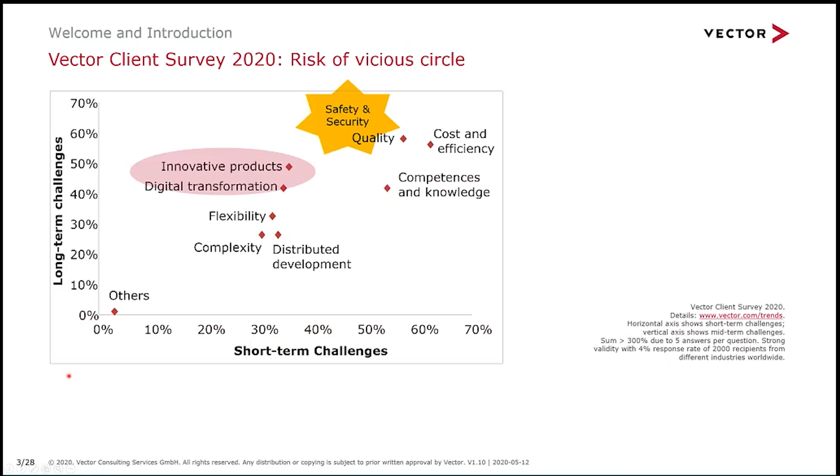Maybe one thing concerning the situation of the automobile industry currently. Each year we do a kind of survey, so this is the latest result of a survey we did end of last year, beginning of this year, a bit before Corona. We found out how companies in the automobile industry are thinking about short-term and long-term challenges. The most important challenges in terms of digital transformation, being flexible, being innovative, and stuff like that.

It is always on, but it moves across the dimensions over the years. If you look at the challenges, short-term and long-term, we always have cost and efficiency, competences, and quality. If you talk today about functional safety and safety in general, that is a quality attribute. Safety is highly demanded and seen as a challenge in both the short term and the long term.

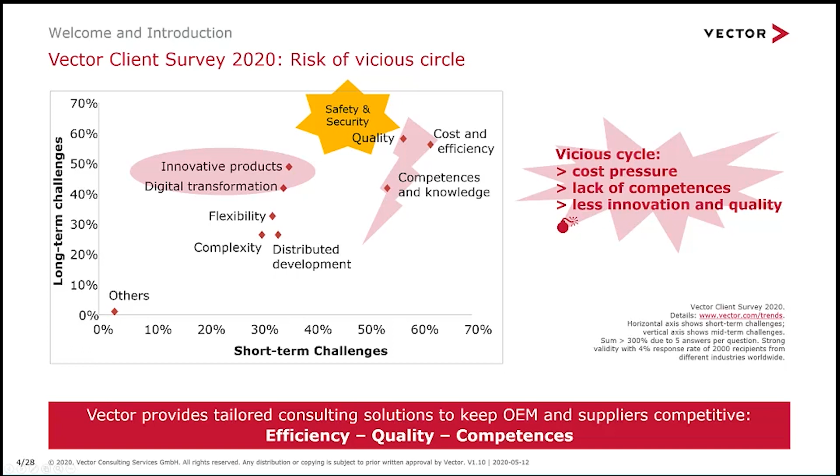So our topic is on the top of the agenda of many companies. We are starting with some of the challenges and concepts of functional safety and safety. We will have a look in the second chapter about our experiences, and before that, we will also summarize a bit the questions and answers. So just to give you a preview, in the middle of the webinar we'll sum up the most important questions answered so far.

That will be in the middle of this webinar to let everybody know what's going on in the Q&A window. At the end, we will also provide a kind of outlook, a conclusion about safety topics we see currently in the industry. And we will give you some advice about upcoming next events on the Vector side you should join to get more information about functional safety and also security, which is another upcoming topic very close to the safety topic.

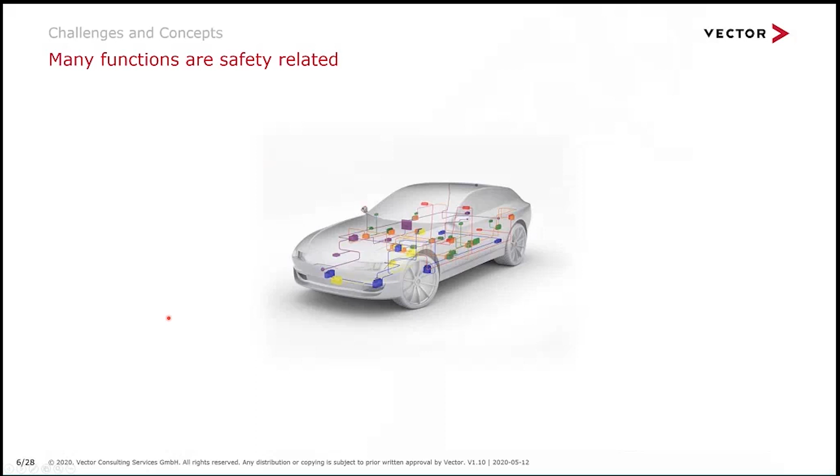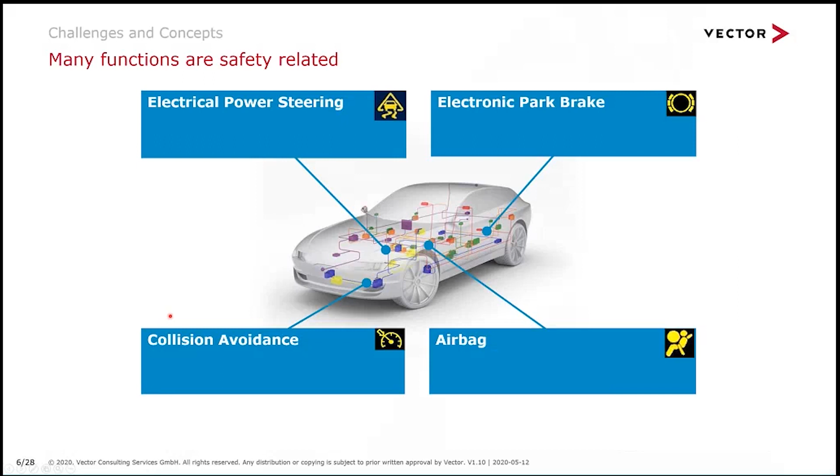Let's start with the basic challenges and concept of functional safety. In the middle of everything is the car with its EE system. If we talk about functional safety, we talk about functions and features, like electric power steering, electronic park brake, and maybe the airbag. There are a lot more electronic systems in the car, functions and features implemented by software and electronics. That is the main focus, the main scope of functional safety.

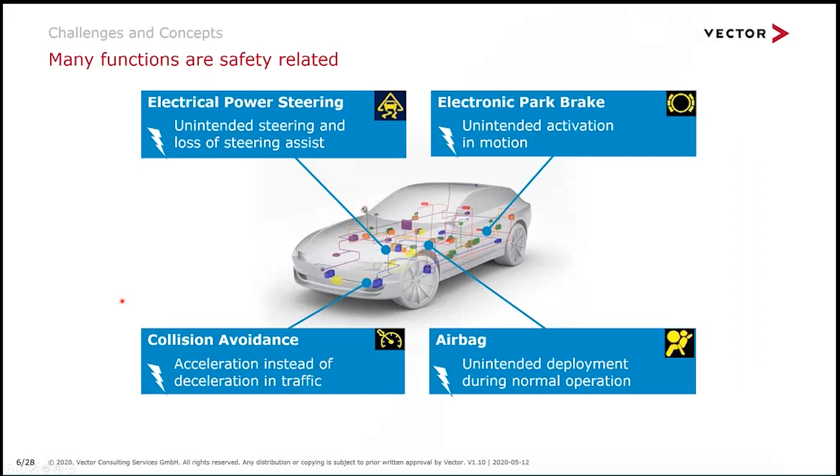Why is it the main scope? Because concerning all these features and functions on the vehicle level, for maybe safety reasons, but sometimes also comfort reasons, they could go wrong. The ISO calls this a malfunction - something not intended on that level of function, like the airbag unintentionally deploying, which is a heavy accident because it could kill people. Also, your electric power steering system could suddenly steer in the wrong direction or not support you with torque.

These are malfunctions which have different effects on the safetiness of the car. It could be a minor issue or a major one, but all of them have the potential to harm or kill people in or around the car. Tying that together: functional safety, and the standard written for it, ISO 26262, cares about how we can avoid a malfunction in an ECU or in communication between ECUs. How can we avoid a malfunction occurring, and if it occurs, how we can mitigate the impact - all with the goal to save people's health and life. That is functional safety.

It is about electronics and software, and about fault detection which then comes out on the vehicle level as a malfunction - that is the essence of functional safety. To avoid confusion, sometimes the features and functions we look at from the functional safety point of view are even safety-related functions like the airbag or automatic braking, which exist in the car to save people's lives. But that is not the idea of functional safety itself - there we look at if the function which should protect our lives, like the airbag, goes wrong, it could turn into the opposite and threaten our lives. That is the point we are looking at from the functional safety point of view.

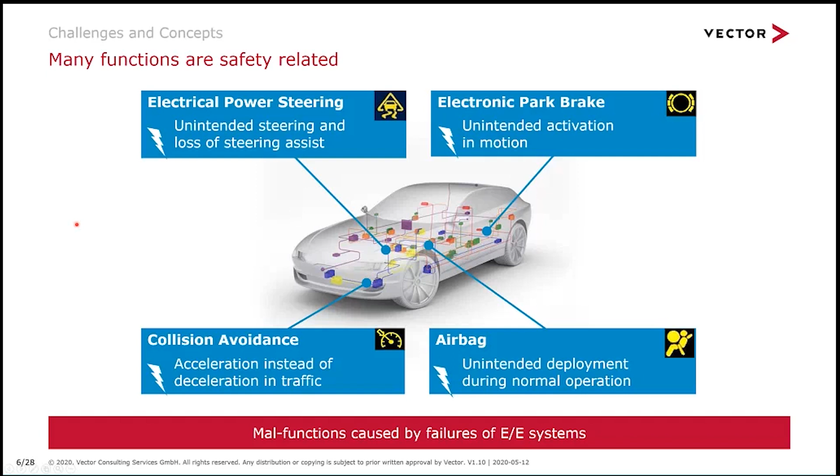Okay, so far so good. The next message is more or less unhappy. Functional safety is, of course, represented by the standard ISO 26262. That's, I think, meanwhile known by more or less everybody.

But the impact of that standard, the impact of functional safety to avoid all these malfunctions, is broad. Unfortunately, it's not just one method in software or one thing in testing. It goes across the whole cycle of engineering activities, but even management activities like project management, configuration management, requirements management. They are all more or less affected by functional safety. So we cannot exclude a portion of a process landscape, unfortunately.

So if you, as a company, start introducing functional safety, you have to be clear that this is a life cycle impacting thing, and that brings in risks of having gaps there and inconsistencies.

But of course, there's no way around introducing functional safety if you are in the automobile industry, because that is meanwhile written in each and every requirement specification: if you have to deliver to a first tier or to the OEM, then you have to fulfill the requirements of ISO 26262. That's a huge effort, not a minor thing you can introduce in the course of a project. You have to set up something like change management to introduce functional safety.

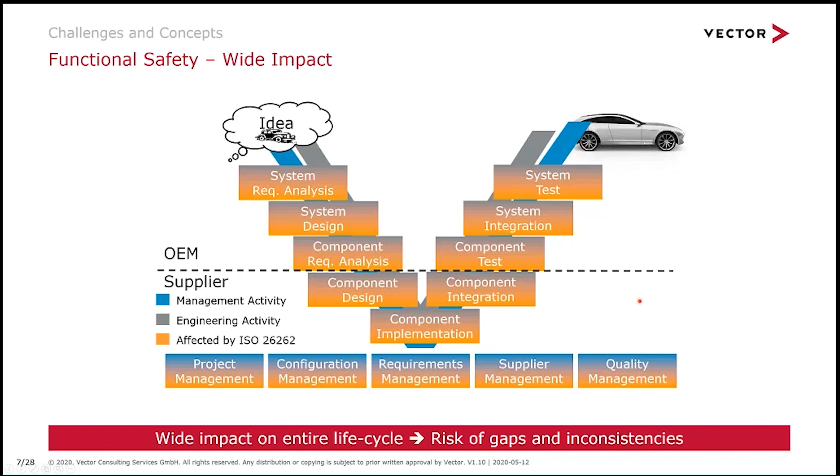Okay, that's some of the unhappy news for us, for guys who are responsible for the process side, more for the engineering side. So what is the next level of detail we are looking at in functional safety?

We have understood the malfunctions, which is somehow here on the right side, on the car level. So the idea of functional safety is that a malfunction is more or less an assumption. We just assume that something goes wrong in an ECU, which is controlling the airbag, or the steering control, the braking system, whatever. That is the assumption, but we don't know the reason behind it.

A hazard is really something we would call in normal language a kind of accident. So now we have bumped into a person, or we have hit the driver by the airbag or whatever. That is the hazard, and that, of course, is what we want to avoid.

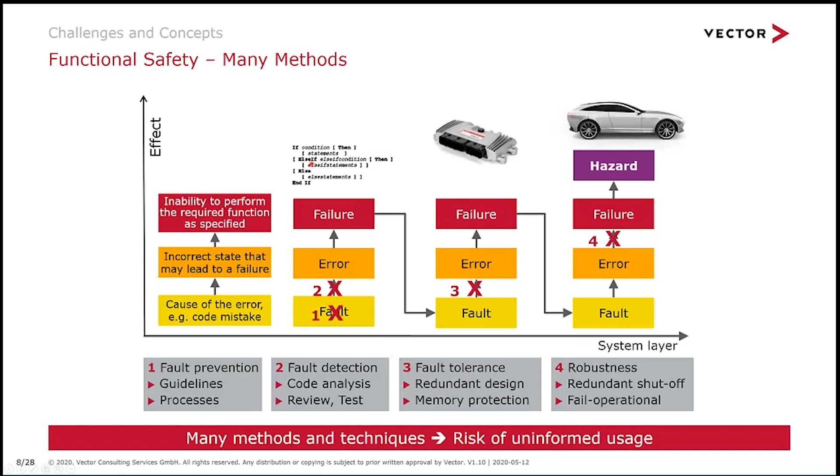That is also important to say a few words about. It is all about minimizing, reducing the level of risk below an acceptable level. So the idea is not having no faults anywhere in the car - that's simply not possible, especially with random faults. You cannot avoid it, you can just reduce the likelihood, meaning reducing the risk that a hazard occurs to below an acceptable level.

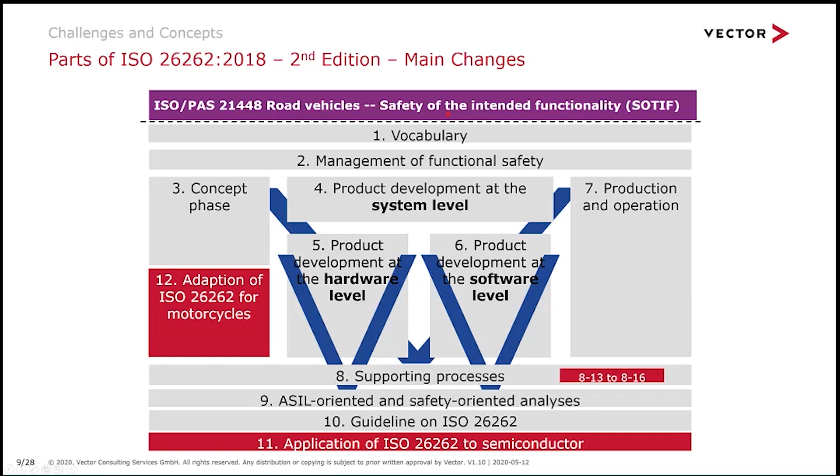Yeah, and SOTIF is its own standard, and what that is about is also safety, but it has to be separated from functional safety. So let me give you a kind of short insight into what the idea of SOTIF is.

In SOTIF, we stop talking about faults inside the car. We are looking to the outside of the car, to the environment, and we say, okay, unsafe behavior, to put it like this, could be also caused by hazards, finally. That's where we meet also the functional safety in that term, but the reason for that hazard could be also what they call functional insufficiencies and also foreseeable misuse by people.

So what is that about? Of course, insufficiencies could be, for instance, I'm using a camera system on my car maybe for adaptive cruise control, kind of traffic sign recognition, and I'm driving towards the sunset. So the sunshine starts blinding my camera, and I cannot detect anything. That means I have a kind of failure in my function, but it's not an internal failure, because the sunset itself is not a failure.

So we cannot avoid driving on roads pointing in that direction. That is not something I can avoid from the technical side. I have to live with that. So I have to at least detect this situation and do something in terms of informing the driver, switching off. That's again very similar to functional safety, but the trigger for SOTIF is something that happens outside of my car, which is somehow something the car with the E-system cannot work with.

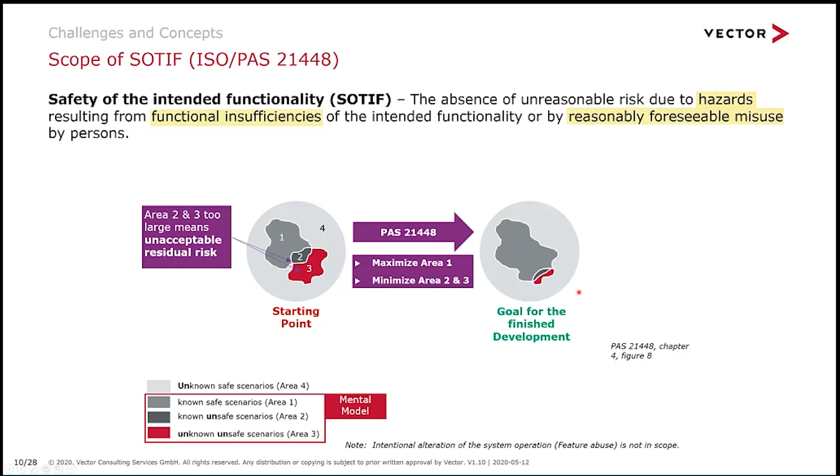And I hope you see the basic idea of SOTIF, how it is different to functional safety.

Yeah, and if you compare both in a kind of big picture, then safety is a kind of - we are making item boxes around ECU sensors and actuators in the car, and we look into these boxes and say, hey, if the fault occurs inside there, how can we avoid it cascading to the outside. So we have to stop fault cascading to the vehicle level by whatever kind of means - process means, or on the car - to avoid what they call a safety goal, that is the starting point of the essential requirements for safety. That's a safety goal. So we have to avoid that somebody gets harmed or killed. That is, of course, the idea of having safety goals.

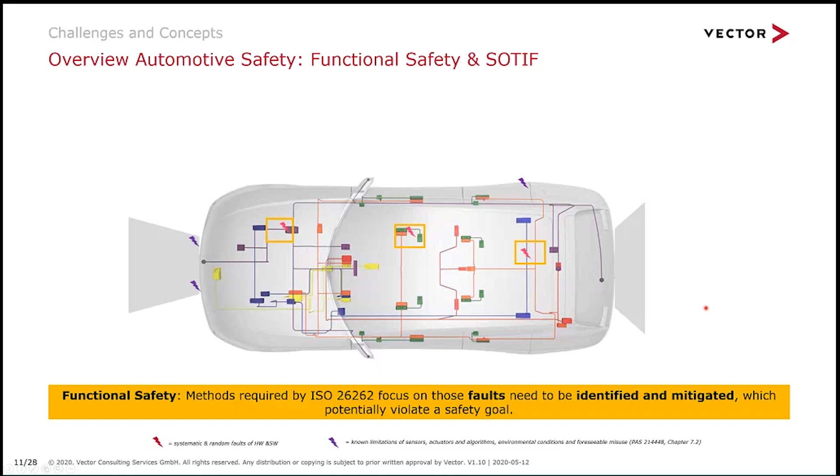So the second thing is then, okay, something is on the outside, my sensor is blinded or is not looking in the right direction, or the angle of my sensor on the front has a too small detection angle, or whatever is the reason behind, could lead to some accidents or some unsafe scenario. And that is a limitation of what we have designed, limitation of sensors, limitation of actuators, whatever. That is the SOTIF part, right? We think about that even during development time, if we have sufficiently good sensors or actuators and also computational power on the ECU, that we are reacting on certain events, the known scenarios, in time before we hurt somebody. So you see there's an overlapping in the goal, but the techniques and methods are quite different.

Okay, so far about the SOTIF, that was a kind of sidestep we have introduced here to the functional safety part. That is the main part, of course, but we think functional safety today can only be understood if you know the other side, which is upcoming, the SOTIF side. But maybe you got also the message between the lines that SOTIF is currently interesting if you talk about level 1 and 2, but the industry knows how to deal with that.

Most of the measures we have to implement is more or less informing the driver if our EE system concerning sensors, actuators, or whatever is coming to its limits, then we have to inform and we switch off. So the engineering part behind is not so challenging currently, but in the future, if we have more and more level 2 plus, level 3, level 4, or even level 5 car functionality, then SOTIF is an upcoming challenge.

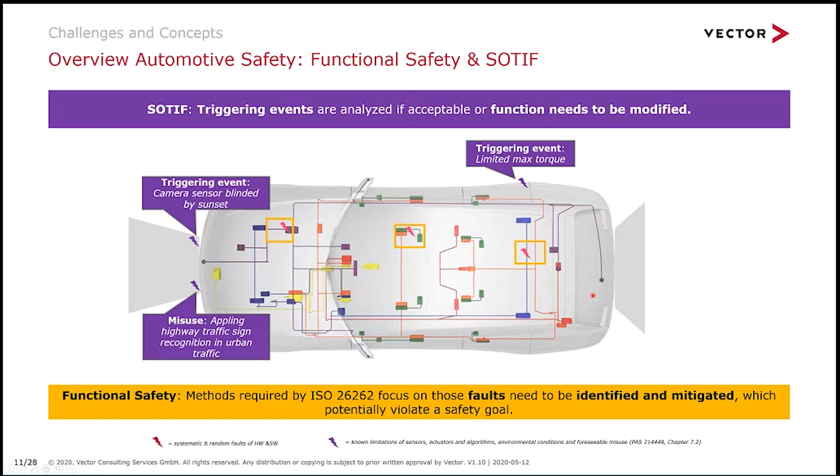So that's the reason why SOTIF today is there, but it's not playing a big role in the area of concerns. That is still on the side of functional safety, because that is from the method side much more demanding.

Okay, back to functional safety. Not to forget to say that it is just one standard in the automobile industry. It's not the only standard, of course. It represents a part of state-of-the-art of science and technology. But there are others. So, of course, all the known process standards like CMMI, of course, laws concerning homologation of cars, of course, very basic standards like ISO 9001 and ISO TS 16949. These are all known and basic standards which are below ISO 26262 in terms of ISO functional safety.

It is building on these standards, not kind of higher priority picture. It is a picture of how we stitch different levels of process maturity together. And ISO 26262 can be seen as a higher level of maturity upon all these other known process standards. But it's not only a process standard, it's also technology involved, right? So it's something I've mentioned already, that we have to do something even on the car. It's not just process during development time.

And not to forget that, even ISO 26262 is basically not sufficient to represent the state-of-the-art of science and technology. If you are precise in that area, then you have to also name the research part, which is shown on conferences or written down in white papers and stuff. That is all part of science and technology. So that means for the legal aspect in the company, just to introduce ISO 26262, it would be a mandatory step, but it's not necessarily sufficient to do everything you can do to avoid liability issues. Right? That is more the message for the lawyers among us, but it's important to say that because safety is about avoiding harming people, so that is naturally the fact that we have to talk about liability.

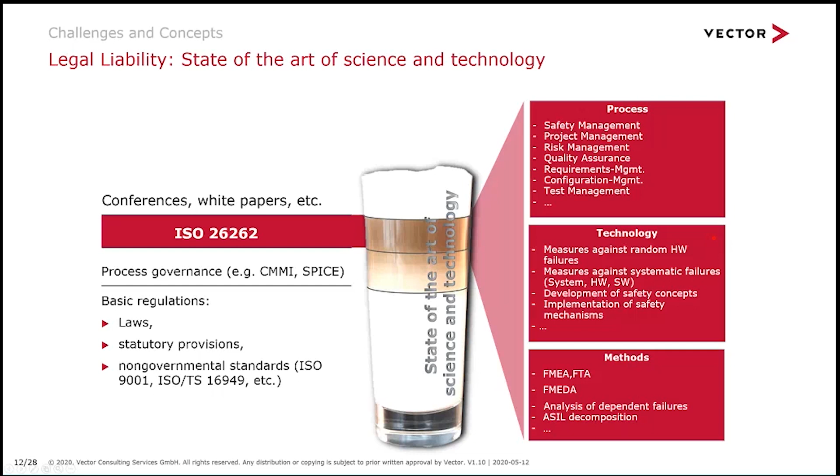And the good news is ISO is helping us to do everything we need to do. It's covering many, many things from the state-of-the-art of science and technology point of view, but it's not everything, because technology and processes are evolving. So again, level of automation is one point. So the ISO standard cannot be on the top of all these developments. It's always a bit behind. So from a liability point of view, we have to care also for things which are ongoing in our industry and shown and documented somewhere else.

I mentioned already the ASIL. That is an important quality attribute in the functional safety area. What is behind basically the ASIL term? The name is of course an abbreviation - it's Automotive Safety Integrity Level. Integrity says something about the quality of implementation of a function.

So how is that calculated, or defined? That is of course a risk value, which is always in quality. We talk about a kind of risk measure in terms of how many faults are allowed for this function. You could express that by ppm or other quality metrics, but that is not done here. ASIL is just a term, a kind of enumeration of 4 stages. ASIL can be A, B, C, or D. That's it - there's no physical unit behind it.

But the idea behind it is: the higher I am in the ASIL - A is the lowest value and D is the highest - it means the higher you go in the range of the ASILs, the less faults are allowed for this function. So that means, on the other side, it is somehow more critical.

What does it mean? That's expressed by the formula you see here above. It's, of course, again the risk formula about the product out of severity and likelihood or probability. That is true for each kind of risk - it's always a product out of these both dimensions.

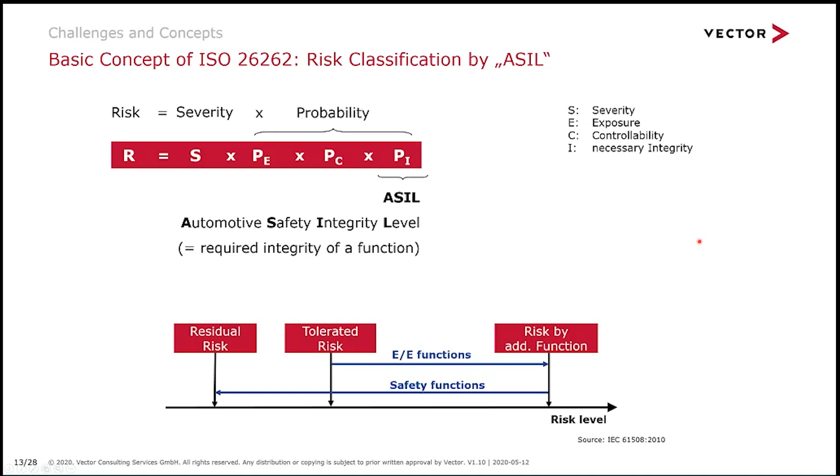So whatever I do in my functions, it is an additional risk, and I have to do something on the car or in the process to reduce the level of risk below the tolerated limit. PI somehow gives me the measure of what I can afford for certain functions, considering the driving situation, to keep a certain level of risk. But we, of course, don't calculate with this formula directly - that is just to understand what ASIL is. What we do is the HARA, which I mentioned already.

This is looking like this. So on the left side, you see scenarios.

It starts with the malfunction. Here we have the example of adaptive front steering, a kind of steering support. It can be no support, or steering turning the wheels into the wrong direction - so I'm steering right, and the wheels are steering left. It can be oversteering, steering too much according to my steering angle, and so on. So we have a certain number of malfunctions, and we put these malfunctions into different kinds of driving scenarios.

Each malfunction typically goes through many driving or operational situations. That's the term used by ISO. It's a kind of driving scenario where you look at the speed of the car, what is the environment of the car - highway, road, in the city, or during parking or whatever - and what are the weather conditions around.

That is all making up the operational situation, and then we do a kind of evaluation of those values we know already: exposure, controllability, and severity. They are evaluated by, again, 4 stages. Each dimension has its own 4-staged model, some definitions, and out of these, by determination of criteria using a lookup table, we get the ASIL.

That's the basic idea of what they call the HARA. HARA, again, is an abbreviation for hazard analysis and risk assessment. That is a method that's shown here.

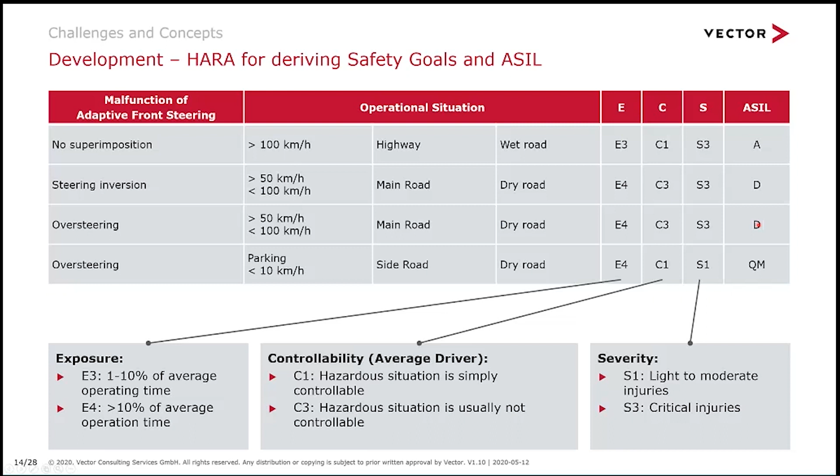That is the starting point of functional safety. Without having done that, you have no safety in your requirements, because behind here, we have not shown all columns. There should be also a goal, the requirements tied to this ASIL. So the ASIL alone has no meaning - you have to tie that ASIL to a requirement.

It's not shown here, but we can see it on that table above. So if you reduce the HARA to the essence, you get a goal out of it, you get an ASIL for the goal, and you get a description of the safety goal - for example, we have to avoid the airbag inflating unintentionally above a certain speed or something like that.

So it's a very general requirement, and we are starting from this requirement, going down. The item comes from the right side, then we have our HARA, and then we go down to the next level of requirements, called functional safety requirements. They further detail out the very high level safety goal into certain separated requirements.

These requirements are allocated then to an architecture - a functional safety concept where we have the software and hardware independent solution. Again we refine this level down to what we call the technical safety requirements. Now we're talking about software and hardware. On the right side, we have again a detailed solution. From that side, this is the technical safety concept, and we have technical safety requirements.

You'll see that the concept of system engineering is deeply embedded in functional safety, doing the refinement of requirements on the left side and the refinement of solutions on the right side, according to certain levels of refinement which are defined by the functional safety standard ISO 26262. So that's the backbone of functional safety.

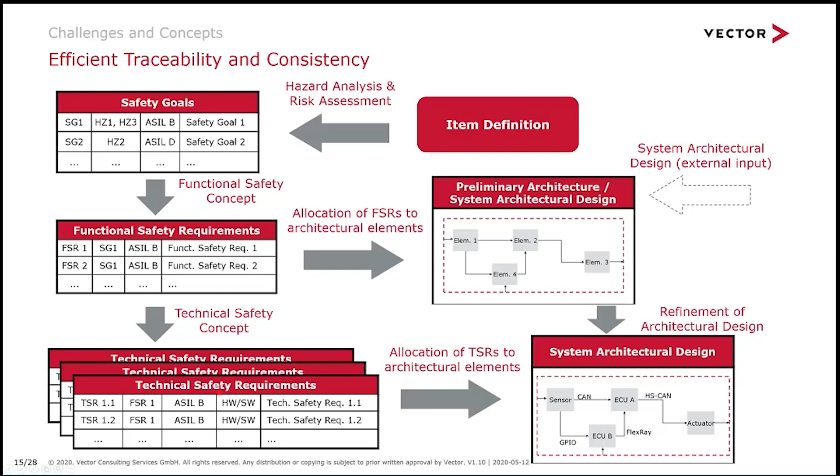Important thing in functional safety is that it's not just system engineering - it is heavily relying on system engineering, we'll talk about that. But there is more, of course, because we have to find faults and failures. This cannot just be done by refinement of requirements and thinking about solutions.

So one very obvious thing in functional safety is applying so-called safety analysis techniques, typically implemented as FMEAs and FTAs on system level, hardware level, and even software level. Without going into too much detail here on how FTA and FMEA work - they are both different techniques, both have the same goal: to find, during development time, as soon as possible, potential root causes for faults and failures.

The FMEA does that by the so-called inductive approach. They start by thinking about potential faults on the system level - maybe range exceeding of a sensor - or on software or hardware level where we really have too high voltage or a shortcut or whatever. These are just things we are thinking about. We are not testing them.

We are thinking about them, and we also think about our solution. What would happen to our solution? Would we find that fault? Would we react accordingly?

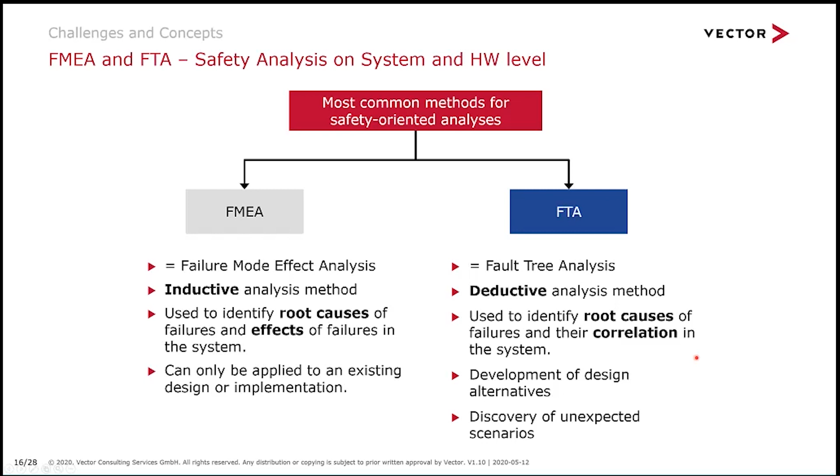If we tie everything together, it's all about faults and failures. We have different kinds of measures. You could easily separate them: some are to find random failures, some are to find systematic failures. So all the process-related measures, like safety analysis, applying system engineering approaches, requirements, traceability and stuff like that, these are all applied for finding systematic failures in our solutions.

But you can also put measures on the product. It's a light gray area to find systematic failures by, for instance, applying self-tests or putting in redundant functions which check what goes wrong on the product. It could also be a systematic software failure we have not found during development, which occurs in the field.

And of course, we still have measures in place to find these failures. But for sure, we also have random failures. They can only be found during the lifetime of the product. That means, again, we need so-called safety mechanisms which are doing some diagnostics on the product to find out what's going wrong. In most cases, it means we have to switch ourselves off, go into a safe state.

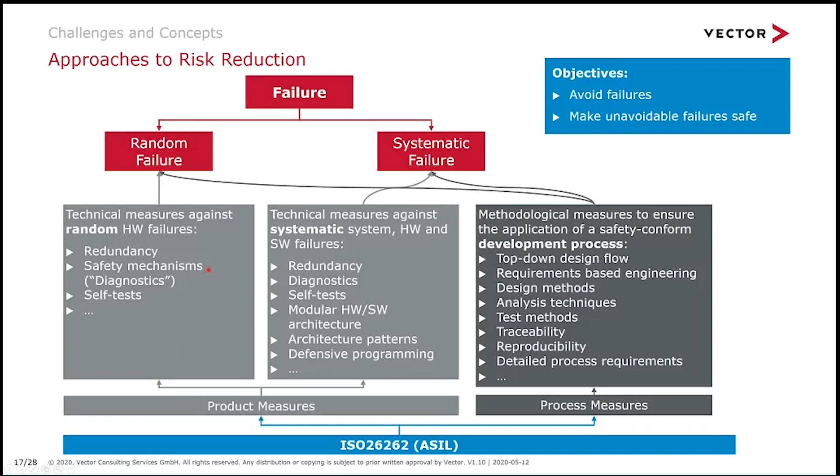Okay, that is the first part of this webinar. The second part will not be as long as the first, so don't be concerned. But it's time, because we went through a few important challenges and topics of functional safety and SOTIF. Maybe I see it already by looking at the Q&A window—there have been a few questions, so it's time to switch to Andreas, who will provide some top-level questions and their answers based on what we've seen so far.

Yeah, thank you, Arnold, for this presentation. I will try to keep it very short, because we are all looking forward to you sharing with us the experience we've made over the last years. There were some questions around, and I'm still answering most of them.

Some were dealing with the scope of ISO, so what is really covered by the standard—vehicles and stuff like this, so passenger cars, trucks, buses, and so on. What is really in scope? It's the development of E/E systems which build up what is called the item. The item is defined as a system or array of systems that realizes a function at vehicle level. This system consists of hardware and software basically, and you find them in sensors, controllers, and actuators. So topics like mechanical are out of scope.

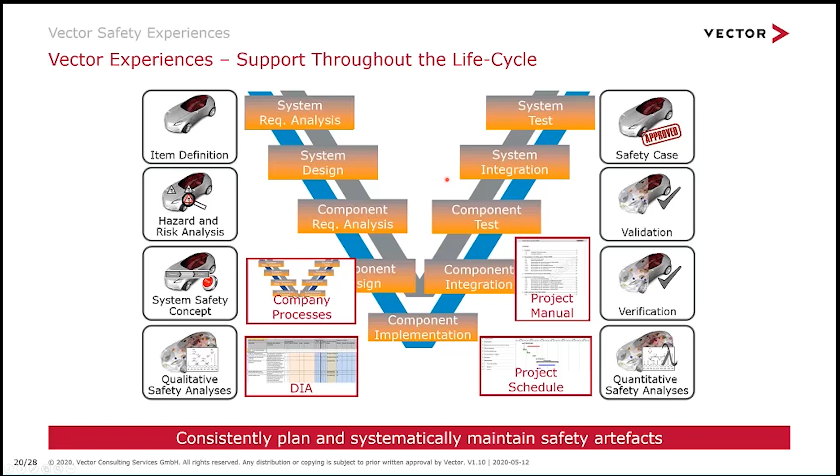That is not so important, as long as we have a metric here that replaces the occurrence of a random fault with the complexity of a component, which leads to the idea: the more complex the component is designed, the more likely it contains a fault. That is the idea here.

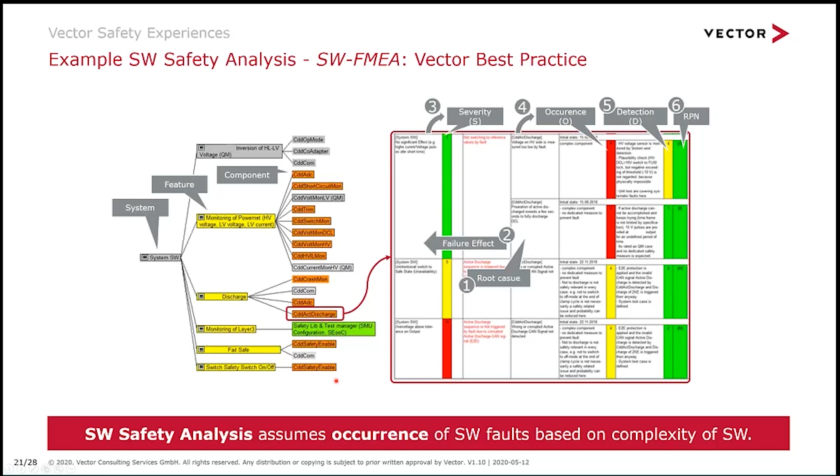Even that is already said. ISO 26262 functional safety is about requirements and architectures. So it's a two-pillar approach, which is part of the system engineering approach. You have requirements and you have to assign requirements to your solutions on different levels. That drives heavily the modeling techniques. So very obvious and prominent is SysML on system level and even UML on software level. These techniques are driven by ISO, not just by the two-pillar approach.

You could also still describe your solution in another way, but latest on software level, it's a requirement to use so-called semi-formal notations, meaning modeling techniques. So in software it would be UML, and along with that we see it more and more coming in each and every development project that SysML is used on the system level as a modeling technique, and that is also still a notation which is semi-formal.

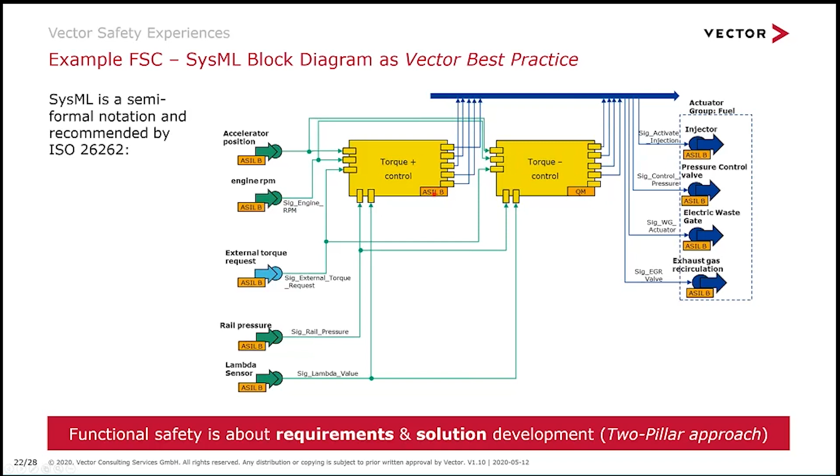That's a DIA to show again the safety life cycle from both sides so that we don't miss anything. That's the idea. The DIA, because both companies have their own safety life cycle, but they have to bring them into alignment by this DIA, because not necessarily everything provided is sufficiently expected on the other side, and vice versa.

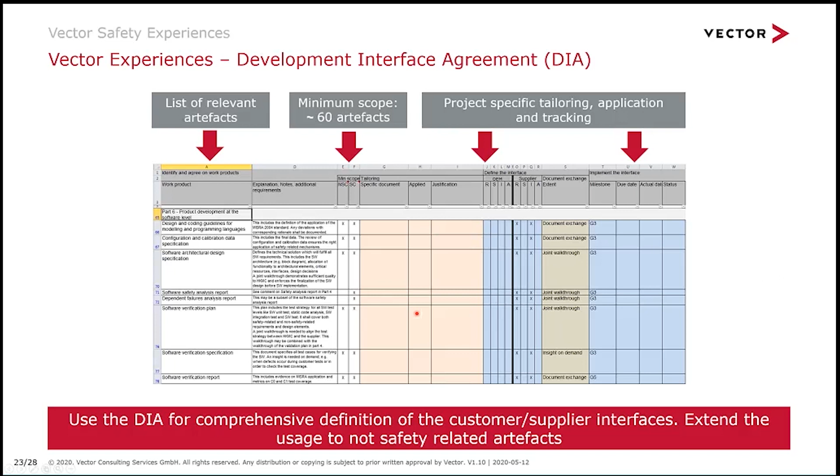Kind of last words, which I mentioned already in the beginning. Yes, this webinar is about safety and SOTIF and functional safety, so it's about safety, let's say, but we see it more and more coming now, and currently this year we see it really in projects, not just on conferences or just for publications. We see it already in projects that safety is heavily impacted by security.

So along with the HARA, which is the top-level start of functional safety, you get more and more the so-called threat analysis and risk assessment, the TARA, which also creates requirements called security goals. So you see the terms are very similar, whether by intention or by accident. You see the concept of security in the car is very close to the concept of functional safety. Of course the content of requirements, and some of the methods, are different—it's not all the same—but it's very closely aligned with the system engineering approach of functional safety.

So if you are in safety, you will certainly meet, of course if your item is affected by security, cybersecurity in the new upcoming projects. That is covered by a standard, ISO SAE 21434. So another ISO standard number is coming up. It's meanwhile in the last phase of being published.

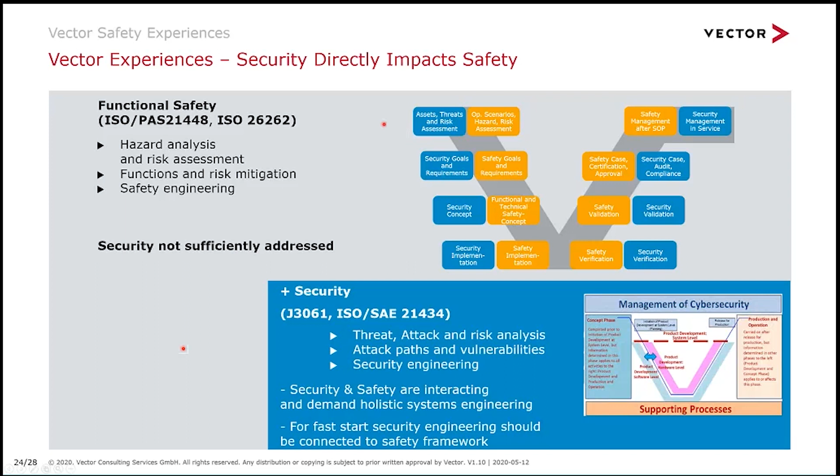That brings me to the conclusion and outlook. Functional safety is still growing, and the majority of OEMs and even tier ones have already written it into contracts and introduced it to their processes. Lots of software and hardware components according to ASIL are available. So we are out of that beginning phase of ISO 26262.

Most companies already have processes and components and products on the market. But we still have new suppliers coming into the automotive market who are not used to ISO 26262. That is a gap we still see.

We still have efficiency issues, so not everything is done. In the early days, concerning processes, companies found smart solutions for efficiency. We have a lot of administration and bureaucracy in the standards and processes, so there is still work to be done. And with more security coming in, that again leads to new improvement cycles on the development process side.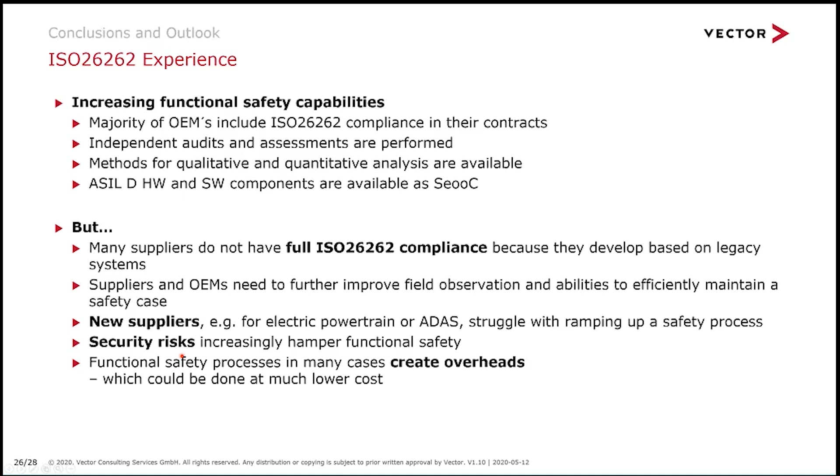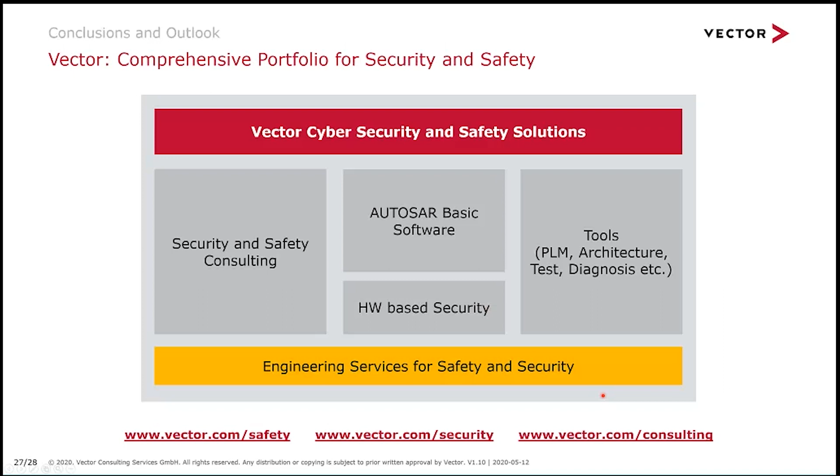Of course, as Vector, we provide you solutions - on software, hardware, and tool side, embedded software like AUTOSAR, but also consulting services, engineering and consulting for safety and for security.

So not starting with pure cybersecurity, but starting with what cybersecurity means for safety experts. That's going to be provided in the Automotive Cybersecurity for Safety Experts webinar on the 27th of May this month. If you'd like to know more, I'd recommend that to every safety expert.